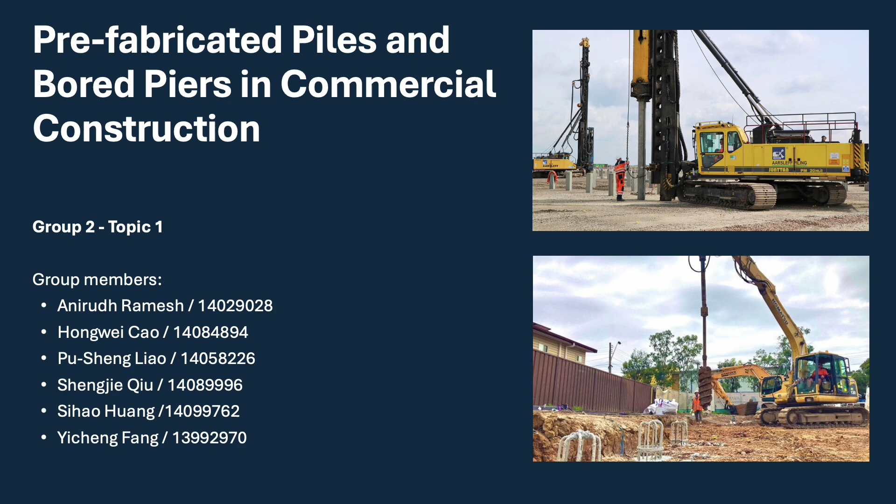First, let me begin by introducing these two types of deep foundation methods. Bored piers, also called drilled piers, are constructed on site. A drilling rig is used to bore a shaft into the ground to remove the soil. Once the shaft is completed, a steel reinforcement cage is inserted to strengthen the structure, and then concrete is poured to form the pier. On the other hand, prefabricated piles are manufactured in the factory and then transported to the construction site. They can be made from timber, steel, or concrete.

However, due to transportation limitations, their size is restricted. Bored piers, on the other hand, can be constructed much larger. After delivery to the site, prefabricated piles are lifted and driven into the ground by a hammer. This installation method generates significantly more noise and vibration compared to bored piers.

Generally, prefabricated piles offer faster construction speeds. Factory production allows for better quality control and reduces on-site labor time. The method is suitable for projects in remote areas or where fast installation is required. For example, large warehouse developments like Bunnings and Harvey Norman often use prefabricated piles.

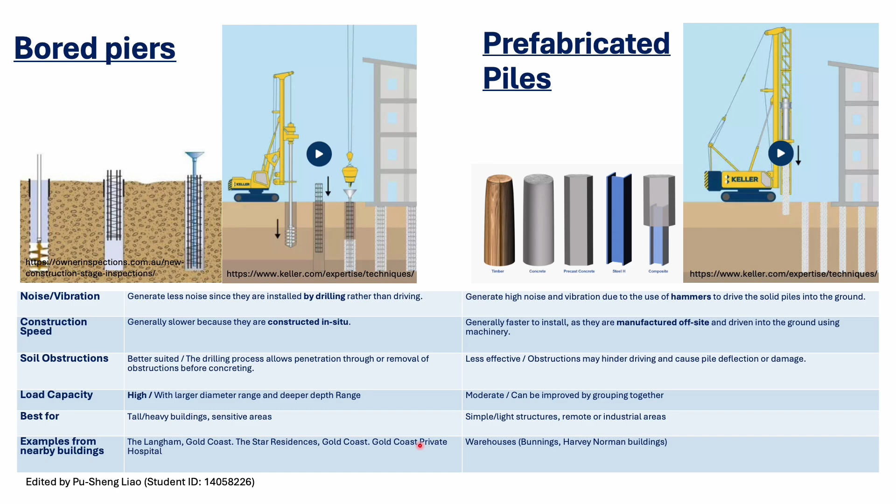Now let's look at the most common types of bored piers. The first is straight shaft bored piers. They are the most basic type in the bored pier family. As mentioned earlier, the construction process involves site preparation, drilling with the shaft rig, inserting the steel reinforcement cage, and then pouring the concrete. The method is suitable for most stable soil conditions with minimal groundwater.

As for belled bored piers, they are an alternative type of bored pier that use under-reaming tools to enlarge the bottom of the shaft. By increasing the base area, they can carry greater loads and resist uplift forces, which may reduce the number of piers required compared to using just straight shaft bored piers. However, the soil must be cohesive enough to hold the shape, otherwise the enlarged section may collapse during construction.

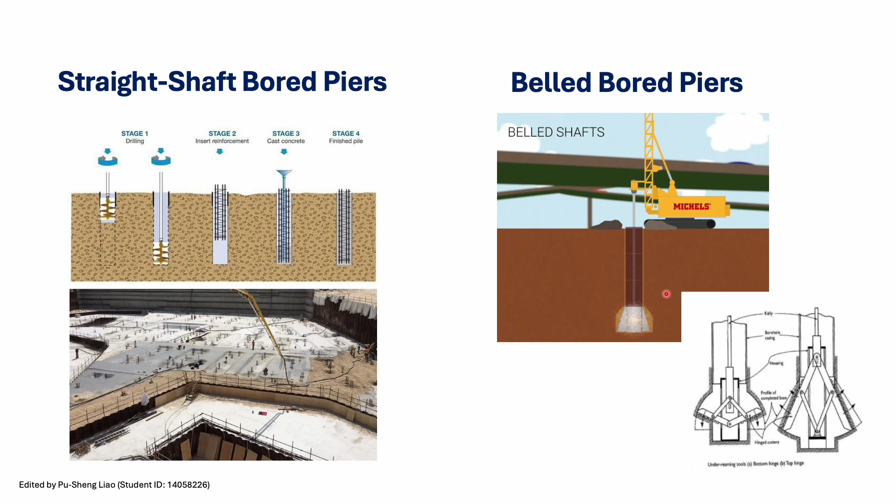There are more advanced types of bored piers using different soil conditions. My team member Jeremy will introduce them. Please enjoy.

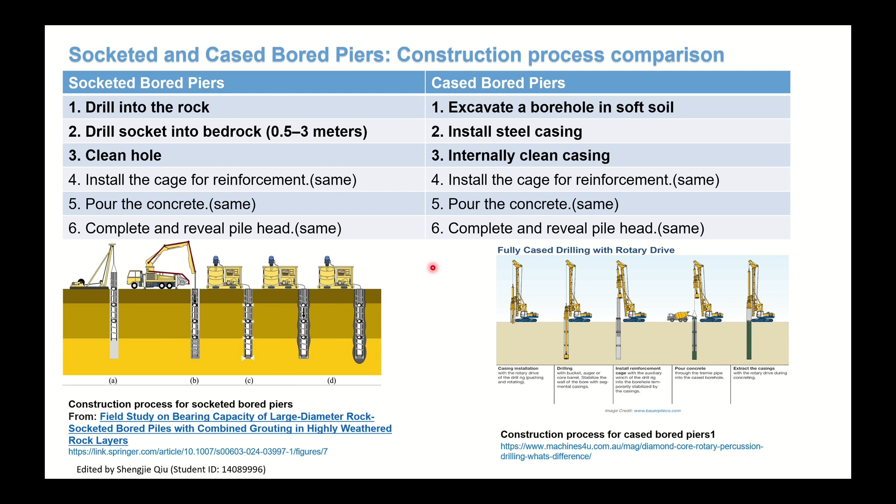After that, steps 4, 5, and 6 are similar to socketed piers. At the bottom of the slide, you can see diagrams showing how each method works. The left diagram shows the process of socketed piers, and the right one shows how casing is installed and later removed. So to sum up, both systems follow a similar process, but the main difference is at the start: one type drills deeper into rock, and the other uses casing to protect the hole in weak soil.

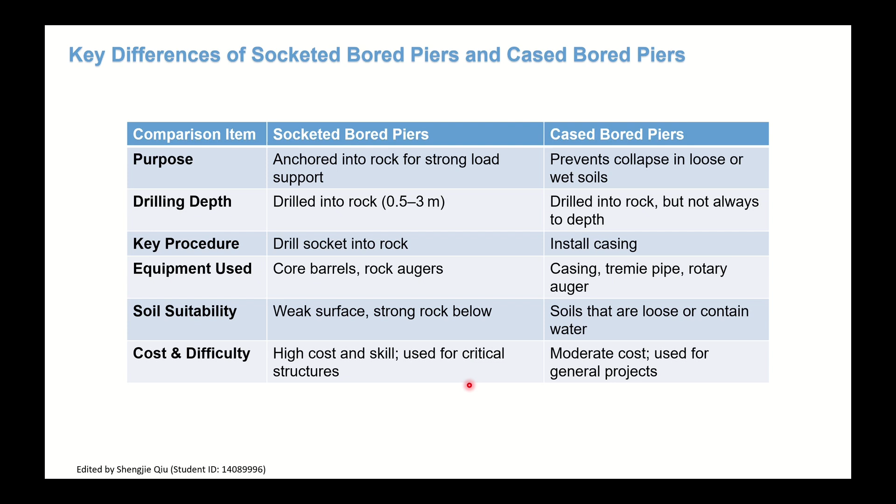And finally, the cost and difficulty. Socket piers are more expensive and need more skill. They are used for big structures like bridges. But cased piers are cheaper and easier to build, so they are common in normal building projects. So, in conclusion, I think we choose the correct type depending on the ground, the structure, and the budget. That's my understanding of the socketed bored piers and cased bored piers.

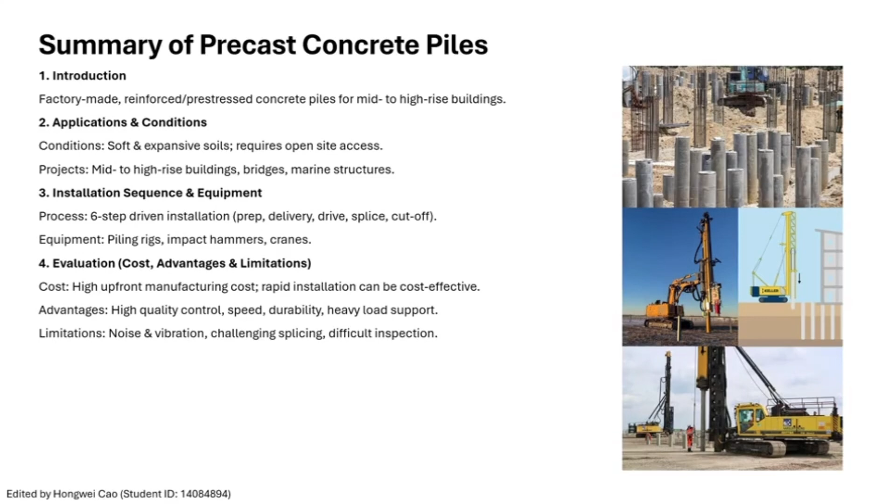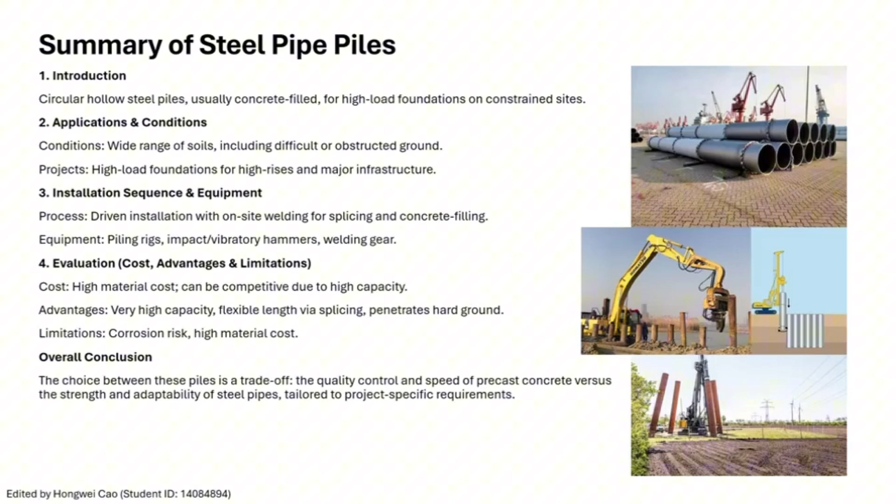So, to summarize, the choice between these two prefabricated piles comes down to a clear trade-off between the speed and controlled quality of precast concrete versus the flexibility, strength, and adaptability of steel pipe piles. This analysis of driven prefabricated systems provides a clear baseline for our main topic.

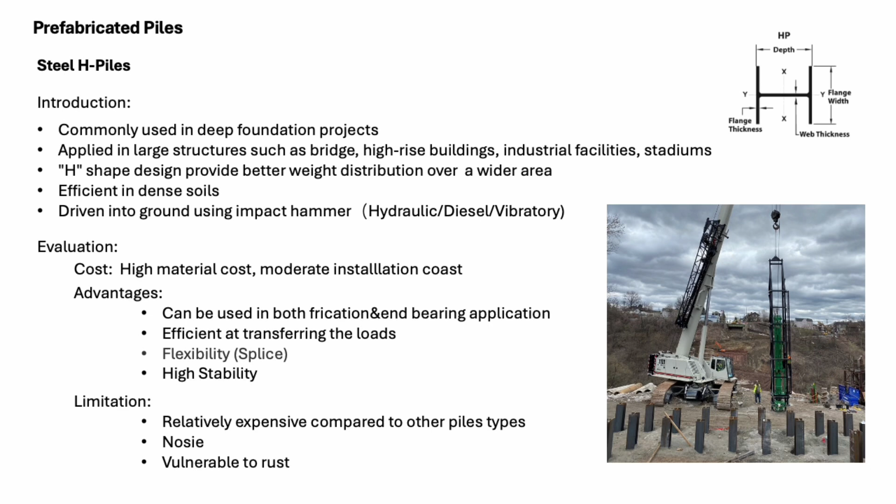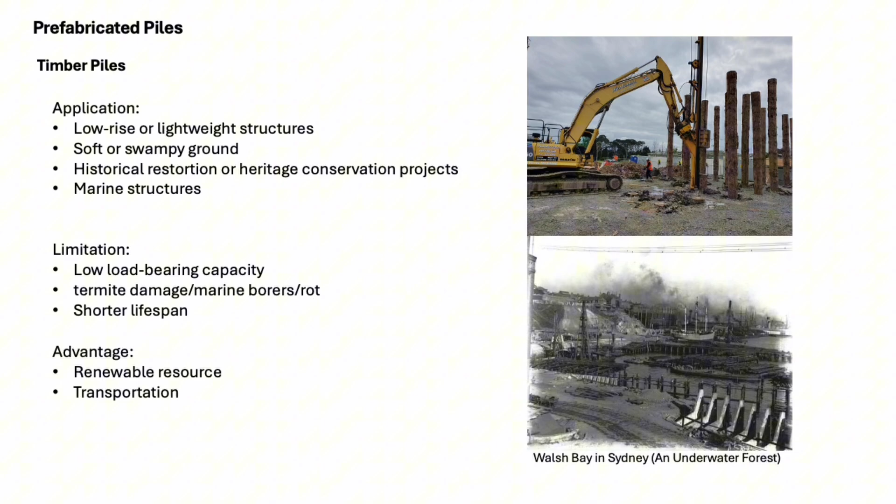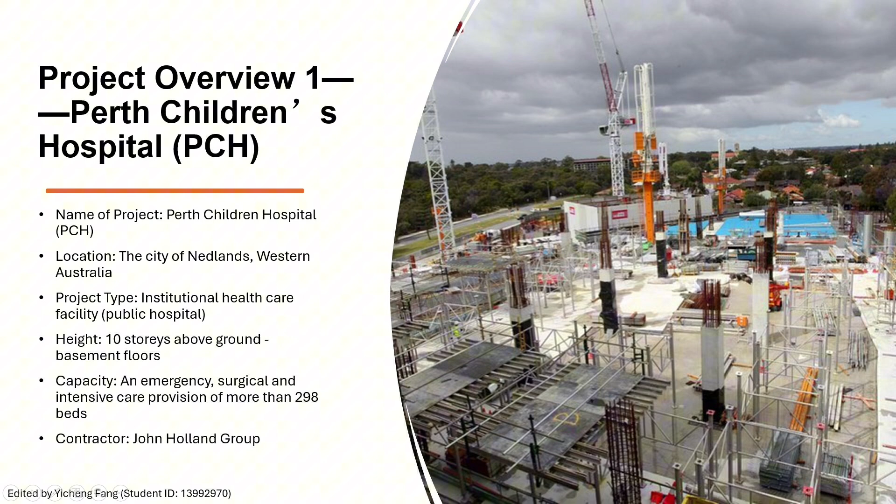Today I'm going to introduce two different cases of bored piers being used in real commercial construction sites. The first one is the Perth Children's Hospital, which we can call PCH. It was under construction in Western Australia. As we can see, it's a 10-story hospital, which includes emergency, surgical and intensive care provision of more than 298 beds.

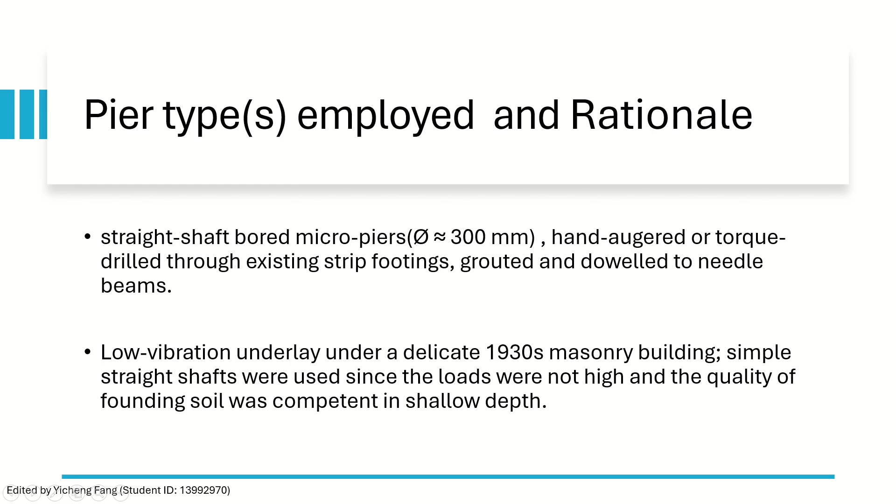So what kind of bored pier and why was this kind of bored pier used? The Perth Children's Hospital used straight shaft bored micropiers, hand-augered and torque drilled through the existing strip footings, grouted and dowelled to needle beams. The main reason this kind of bored pier was used is the low vibration and underpinning under a delicate 1930s masonry building. Simple straight shafts were used since the load was not high and the founding soil was competent at shallow depth.

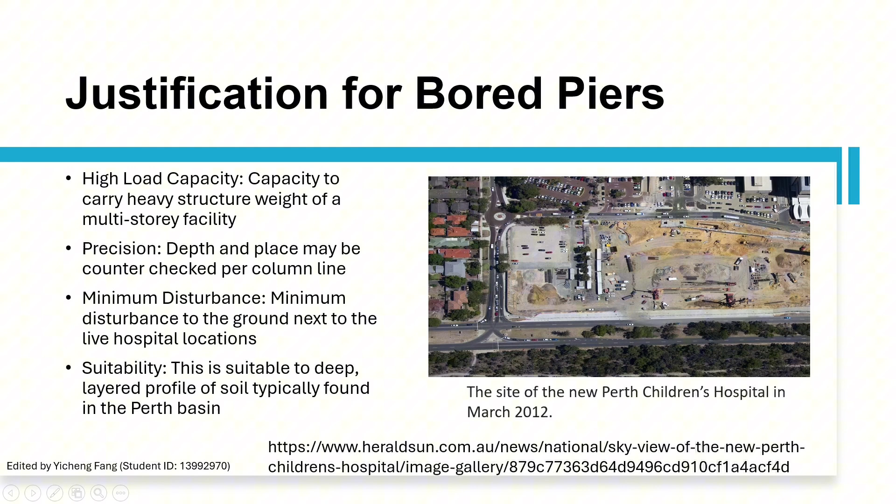The last one is the suitability. This is suitable to the deep layered profile of soil typically found in Perth. Because this hospital is being constructed in Perth, that's a very necessary detail.

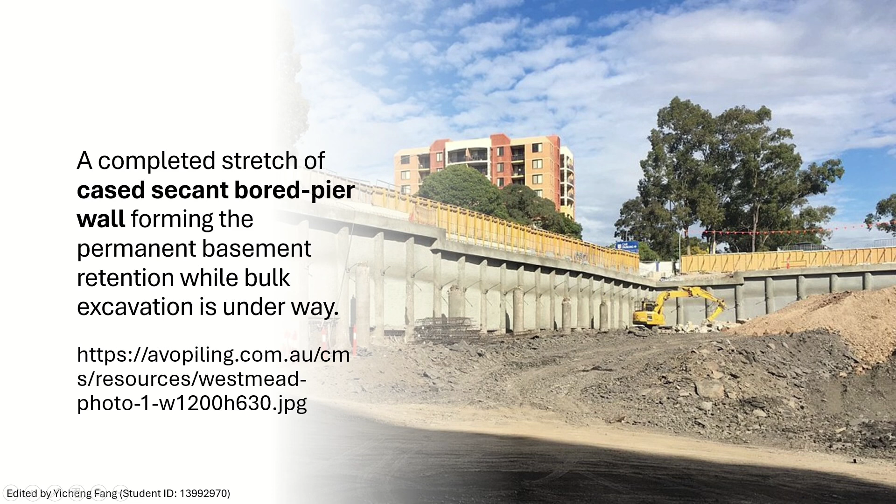We can also see in this picture a completed stretch of cased secant bored pier wall forming a permanent basement retention while the bulk excavation is under way. In the second picture we can see the Kelly bar piling rig installing a 1,000mm rock-socketed bored pier here, and there is a steel cage waiting to be lowered. A lattice-boom crawler crane assists with the cage handling beside the live hospital facade.

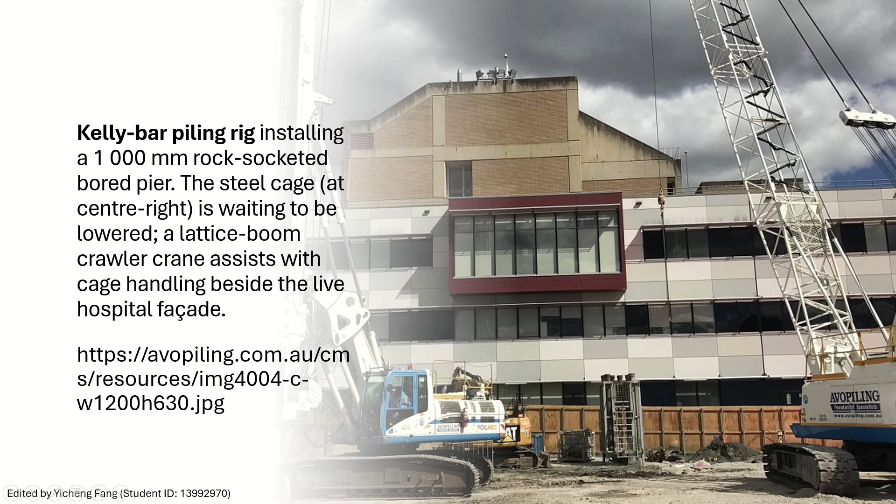So, what about this one? What kind of bored piers is being used for the Sydney hospital, and why is it being used? This one is using cased bored, or we can call them secant piers, to create a perimeter basement wall installed using temporary steel casing to manage the groundwater and provide excavation support. The main reason this rock-socketed shaft is being used is it can apply high axial load at low levels of settlement. Cased and secant piers provide a low vibration retaining wall option adjacent to the hospital.

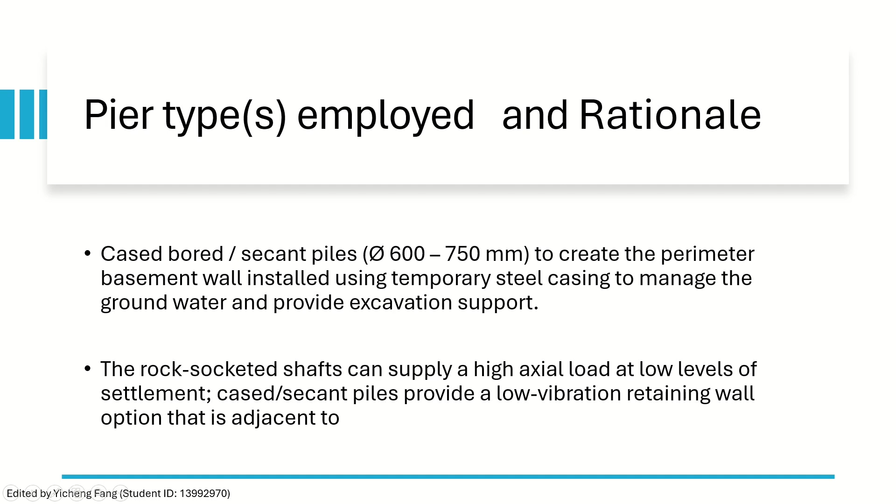Here is a further, deeper explanation of these bored piers. The first one is ultra-low vibration, so it will not disturb the nearby adult and children's hospital. The second one is the strong rock socket strength: a 1,000mm shaft, 3 meters into the rock, which can support 10 to 12 meganewtons per column, upholding the 14-story tower and giving very strong support. Next, the secant wall has a dual purpose: a temporary supporting wall during excavation and a permanent waterproof basement.

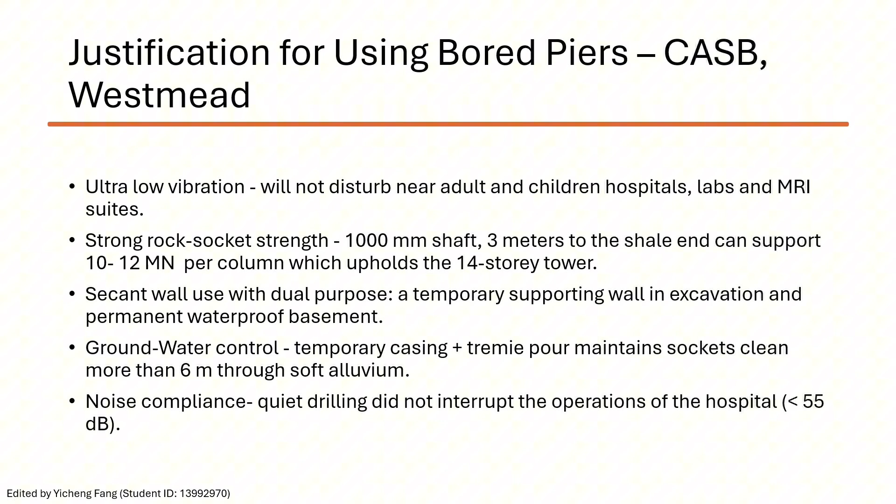The fourth one is groundwater control. It is very necessary and important to control the groundwater. Temporary casing plus tremie pour keeps the socket clean through more than 6 meters of soft alluvium. The last one is noise control. The quiet drilling, less than 55 dB, did not interrupt the operations of the hospital. So those are the 2 cases I shared for bored piers in real commercial construction. Thank you very much.

Hello everyone, I am Anirudh Ramesh, and today I'll be talking about prefabricated piles, the kind of foundation that quietly does all the heavy lifting behind the scenes of major projects. Let me share two real projects where prefabricated piles really came to the rescue. You could say they were the superheroes of foundations.

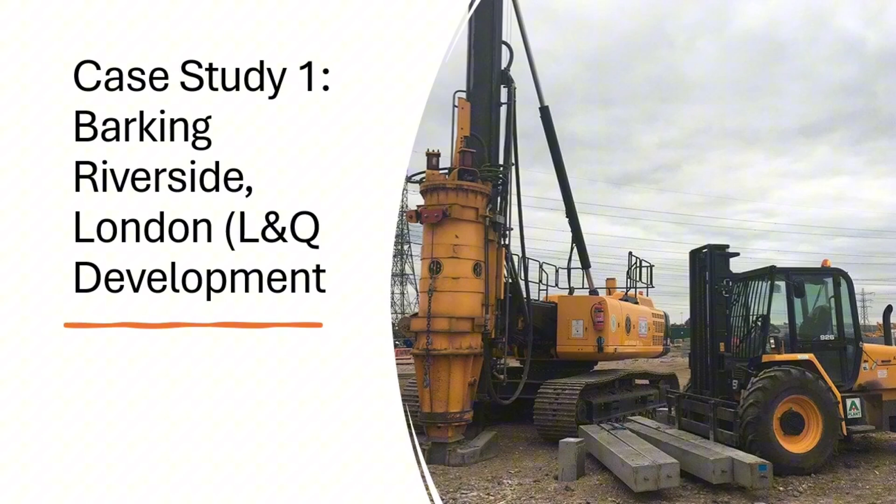Case study 1, Barking Riverside, London. Picture this: a massive housing and commercial development built on an old power station site. The challenge: you can't have a noisy, vibrating construction site right next to existing homes. So what did they do? They brought in square driven precast piles. Think of them as giant Lego blocks for grown-ups, installed with a super quiet hydraulic hammer. No fuss, no noise, no angry neighbors.

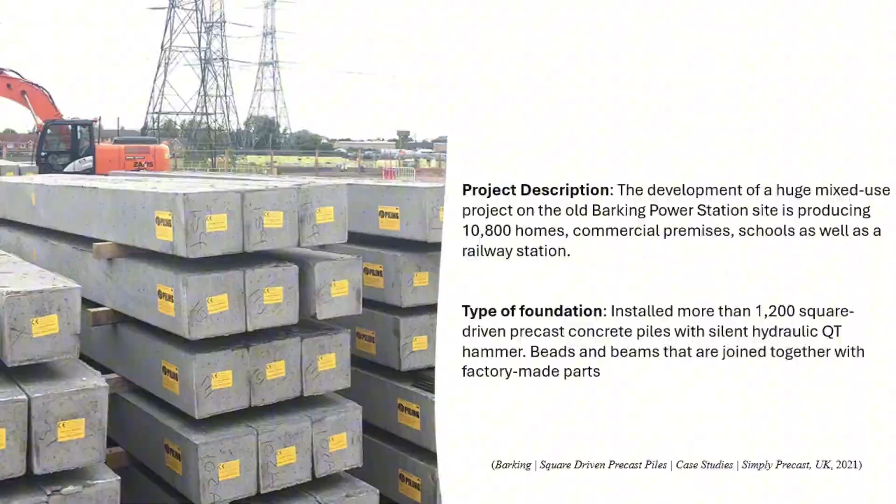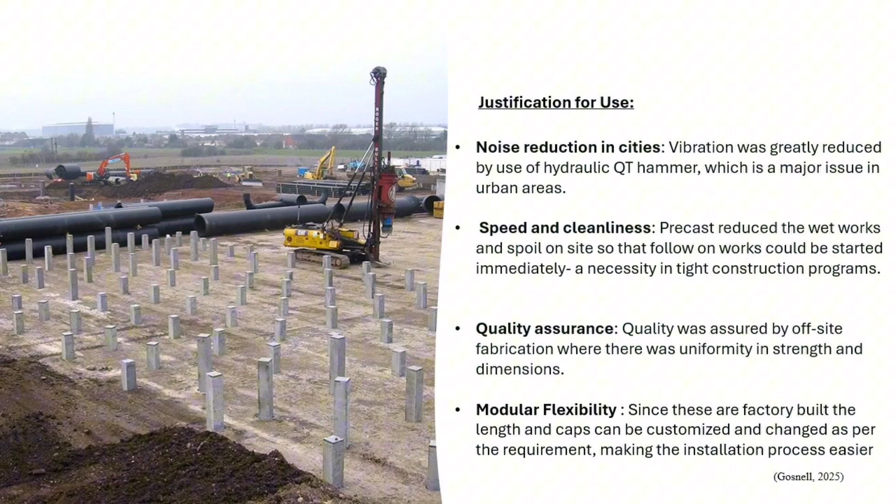Because these piles were factory made, they were strong, consistent, and ready to use immediately. No waiting around for concrete to cure. The result: a fast, clean foundation job that kept the neighbors happy and the project on schedule.

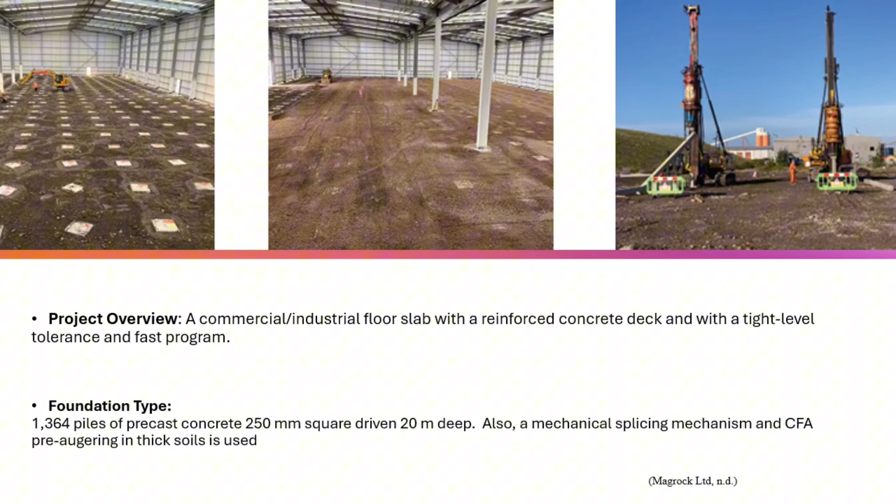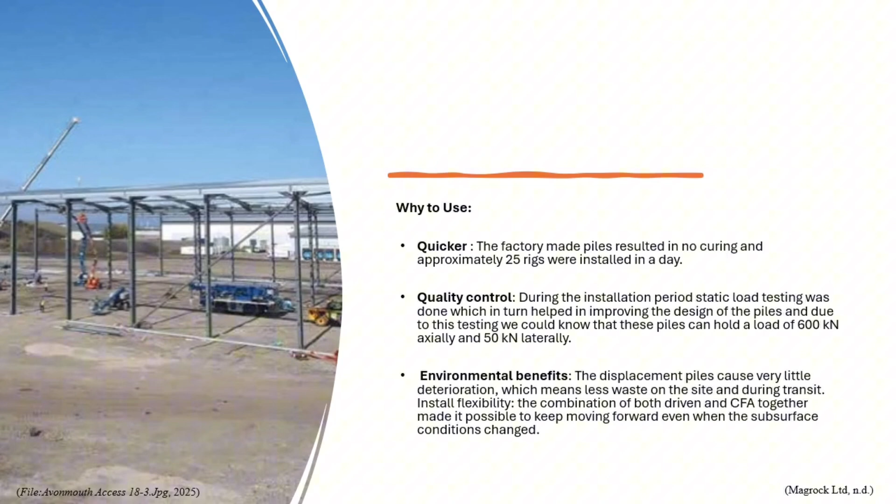Case study 2, Access 18, Avonmouth, Bristol. Now let's move to a big warehouse project where the floor needed to be perfectly level. They used over 1,300 precast piles, each about the size of a chunky chocolate bar but 20 meters long, driven straight into the ground. Why choose precast here? Speed and strength. They were installing up to 25 piles a day, and the load test proved they could handle massive forces. On top of that, almost no waste soil was produced. Fewer trucks, less mess, and a smoother workflow. The result? Quick, reliable foundations with minimal environmental impact.

So what's the big takeaway? Prefabricated piles are basically plug and play foundations. They go in fast, make less mess, keep the neighbors happy, and deliver reliable, top quality results. If foundations had a superhero, this would be it. Thank you so much.